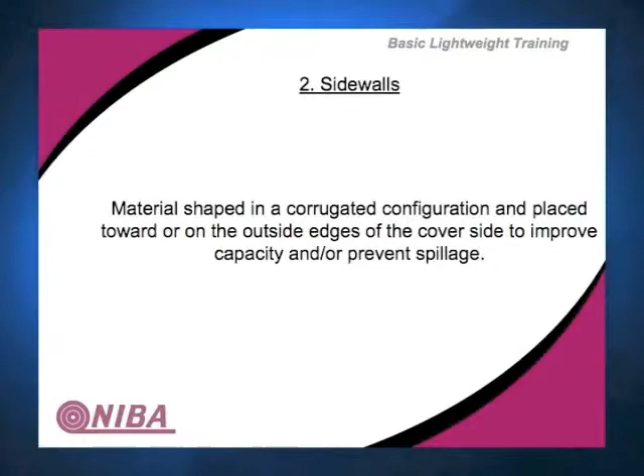Yeah, this is a corrugated sidewall. And again, this can be done both in thermoset and thermoplastic. There's a lot of thermoplastic that is done without any base. It's just a ribbon that is applied to the edge of the belt without any base on the sidewall itself.

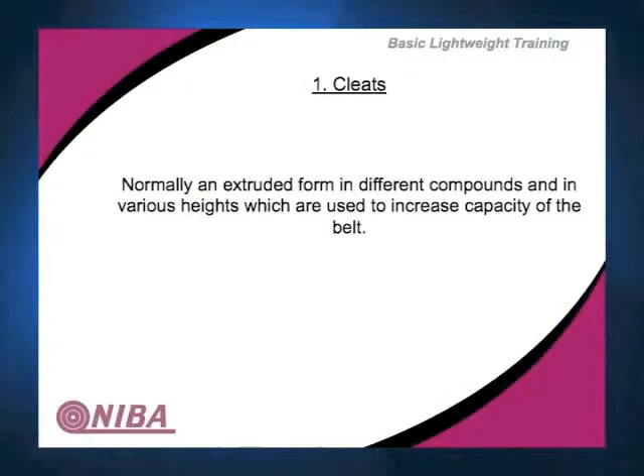Cleats typically have a base that is wider than the cleat itself. I guess that's how I would make the differentiation between cleat and lug. A lug is as wide as it is tall, pretty much. I think that's what you're referring to right there, as a lug. A lot of times they're round, like a peg. Yep, like this. You just have a whole bunch of them across the belt. Instead of calling them a finger, which would be long, a lug might be short. Yeah.

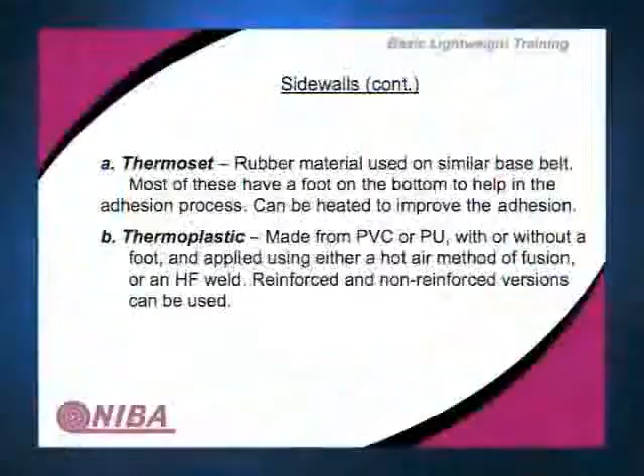Yeah. You'll also hear some other terms meaning the same thing. In the modular belt industry, they call them product supports. They don't call them cleats, they call them product supports. You'll also hear them referred to as pushers, because they're pushing a product as it's going up an incline. I already talked about thermoset, thermoplastic. It's available both ways.

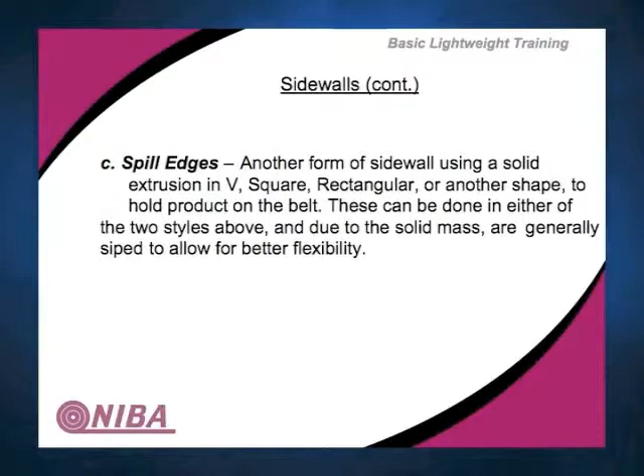Spill edges, again, many times this is referred to as vanners. On a conveyor belt, you put an edge on the belt. It can be like this. All right, guides. What's the purpose of a guide on a belt? To assist it in tracking. To what? To assist it in tracking. To assist. That is the right term to use, to assist in tracking.

One of the big mistakes that's made is if you think that's going to solve a tracking issue. It's to help guide it and keep it in a direction. But it's never intended to be the sole purpose. You've got to pay attention to the rest of the design in order to make sure it tracks.

Because even with a V-guide on the bottom, okay, we're doing this. It runs in a pulley, and that groove is wider than the guide itself. Never let anybody put a C-section V-guide on a belt, or an A-section or a B-section V-guide on a belt, and then cut the groove in the pulley the same size.

It's been tried. It's not a drive belt. And what will happen is you'll tear the V-guide off if it's not allowed to move some. It's a common mistake, Roy. Yeah, it's a common mistake.

A little conversion factor I always like for converting millimeters to inches: take 0.03937 times the millimeter width, and you will have the decimal equivalent. That's important because you're going to get conveyor belts with millimeter dimensions, and you're going to want to convert that to inches.

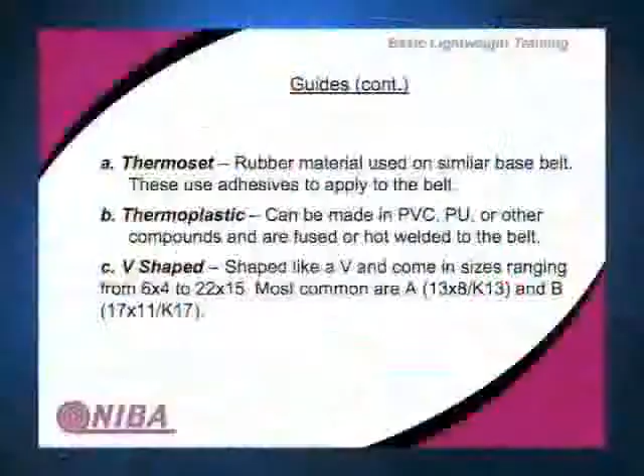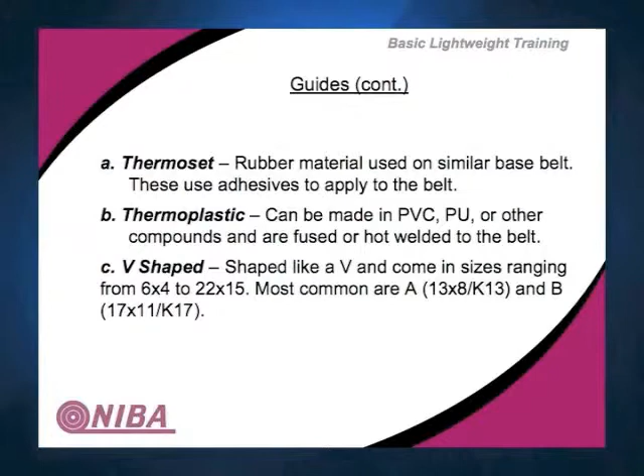The common ones are the A section, which is what it's saying here. The A is close to the K13, and the B section is 17 millimeter, very close to the 5/8. Round shape extrusions, we already talked about that, from 1/8 inch up to 3/4 inch. They're round shaped, and they're used as cleats or edge retainers.

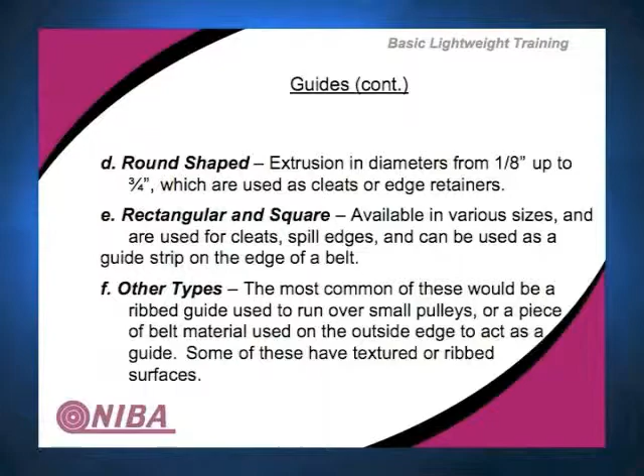Rectangular or square, that came up earlier. Other types, there's V-guides that are used that are actually flat, and they have ribs on them. Anybody know what a poly V-belt is? Yeah. Essentially, it's like that. It's just a little V-guide that goes longitudinally with the belt.

This can be used as a V-guide on a belt, and it'll allow it to go around small pulleys. That's one of the purposes of having that flat V-guide. Used a lot in the baking industry. But there's all kinds of different ways of applying material to belts. You just have to keep in mind the thermoset, thermoplastic. How are you going to apply it?

Perforated belts for a vacuum. In a bakery, you'll see the perforated belt with a cup and a grommet, and it pulls the loaf of bread out of the pan. Depanner belts. And they can be in various shapes. Could be a slot, if necessary. A lot of times it's critical if you've got a vacuum belt that it's punched properly so it lines up with the conveyor bed. You mess that up and you don't have a vacuum belt.

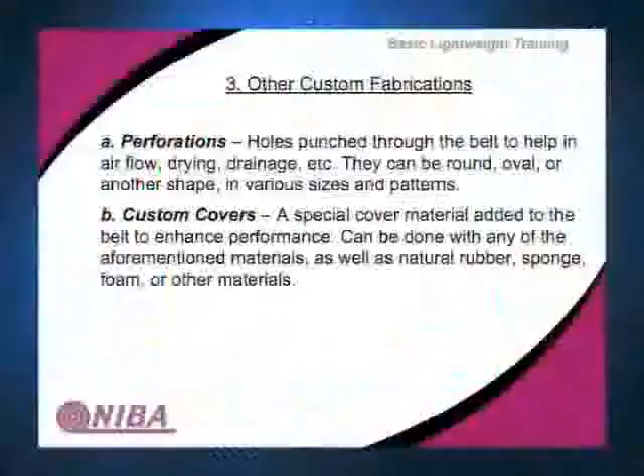There are conveyor belts that are made with holes on the outside edge to run precisely together to pull material through, like computer paper. Those are tractor feed belts. One thing, when you punch holes in that belt, now the belt's not quite as strong as it used to be. You've eliminated perhaps 60 to 80% of the tensile warp members.

And you're adding to that load as well, because you're providing a suction. Suction increases friction, and friction increases power requirements to drive that belt. So you have to make sure you size that belt properly when you do this. Otherwise, it'll stretch like crazy and tear apart.

The last one we have here is custom covers. That's applying another material on top of a belt. Could be a natural rubber, a latex, synthetic material, could be sponge, could be about anything, that you adhere to the top of the belt to create another type of carrying device. An unusual application I can think of is putting large foam on top of a belt that's then slit to width to carry material.

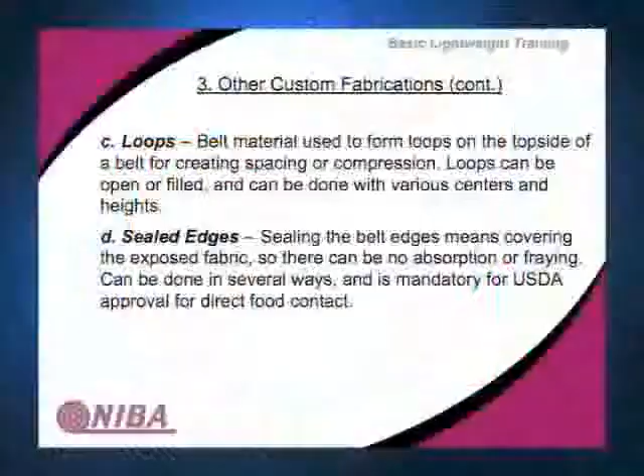The loops. A loop belt can be a cleat that's been formed, and it talks about having sponge or something put inside it to help cushion the material it's carrying. That would be a way you could use a loop belt or loop cleat. Creates compression.

One time, I had a cleat that I worked with that was kind of shaped like that. It was a scrapable cleat. So you could take a scraper and run it on here, and it would come down the backside. It's very slow moving. So you'd have the scraper go up the cleat and follow it down. Just another way of doing it, because it was a sticky application. But it took a special mold to create that molded product.

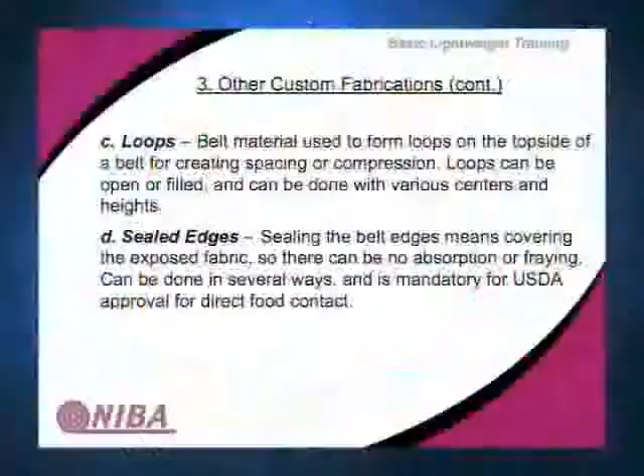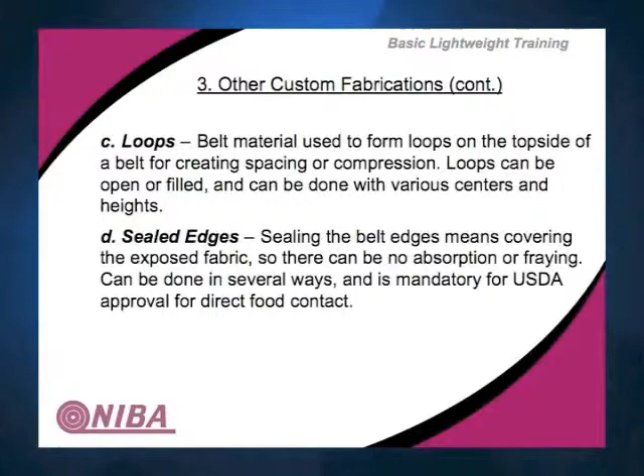Scrapable cleat. Sealed edges. A lot of it is in dairy because they want to make sure there's no bacteria growing inside the belt. Wash down, anywhere the belts are wet: meat, fish, dairy, poultry. Would you like to use a nylon carcass in a food belt that's getting washed down? Why? Because it's hygroscopic. What does that mean? It absorbs water.

So no nylon would be very good, even poly-nylon, because you'd still have nylon. All polyester would be better. Sealed edges are simply to seal that edge to prevent fabric from being exposed to moisture or anything else that would tend to wick in on the fabric itself.